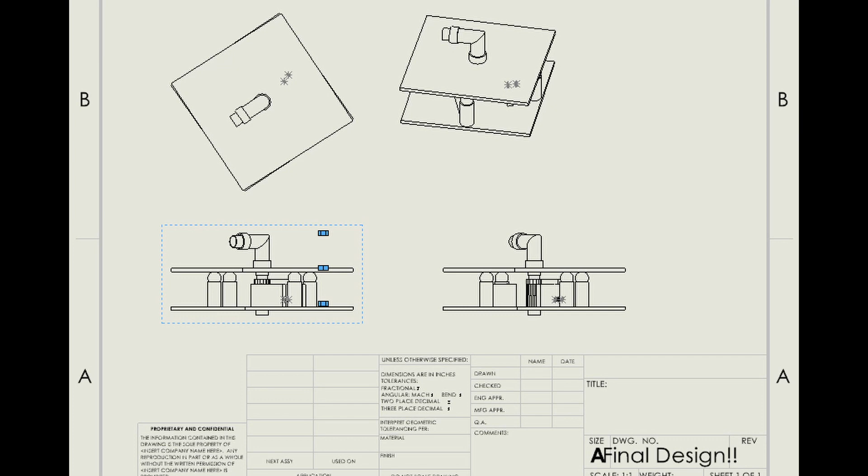This is who we are. This is how we did it. This is H2O.

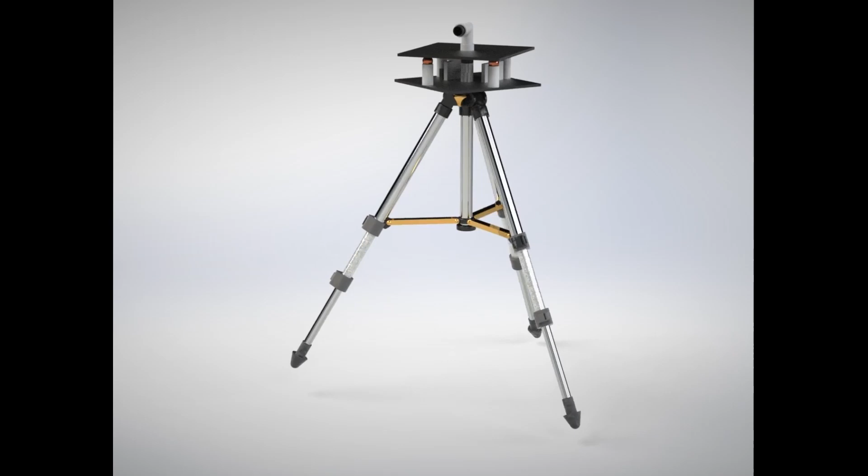We have two flat surfaces. One surface is fixed, while the other rotates with the head of the nozzle, aided by roller ball bearings to reduce friction. Our project has a locking mechanism and an oscillating feature to incorporate flexibility.

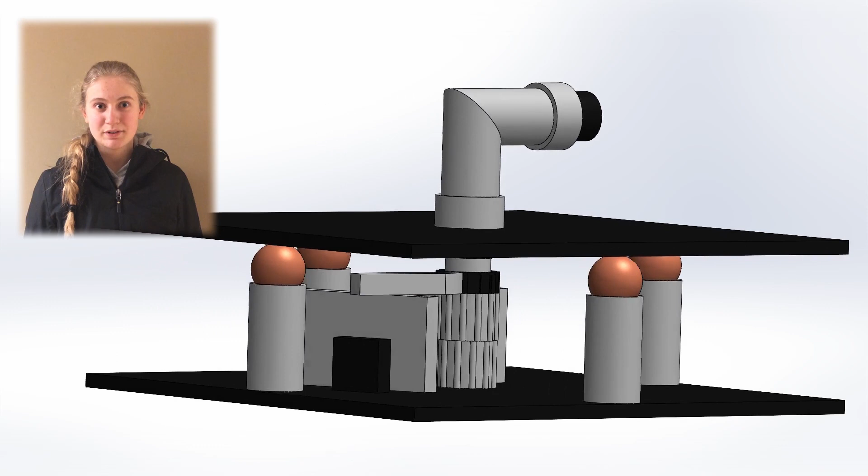The hose attaches to the bottom of the model, where the water will flow up through the pipes and come out through the nozzle attached to the top. The water can cover a wide array of space due to the oscillating feature, but can also be limited to a smaller space thanks to the adjustable locking mechanism.

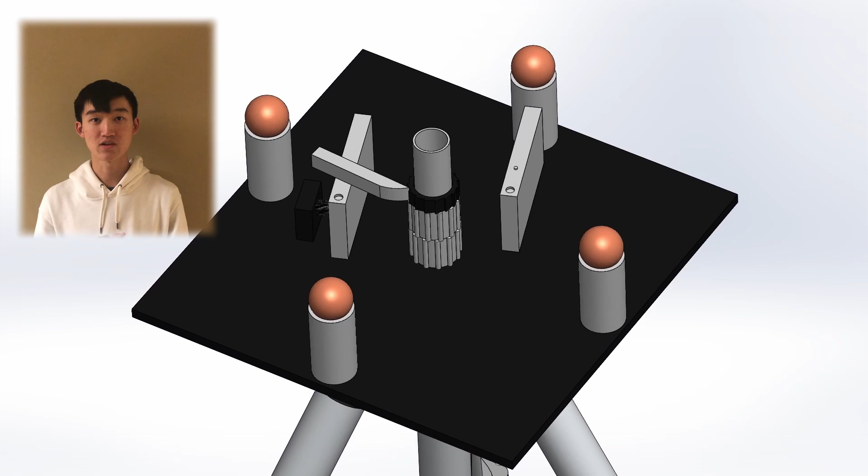The range of our oscillating feature is controlled by a wooden locking mechanism, which is able to regulate the angle between two boards as needed. This will help firefighters control the degree of turning, while the hose remains free to maintain the line, which we will make sure the wildfire does not cross.

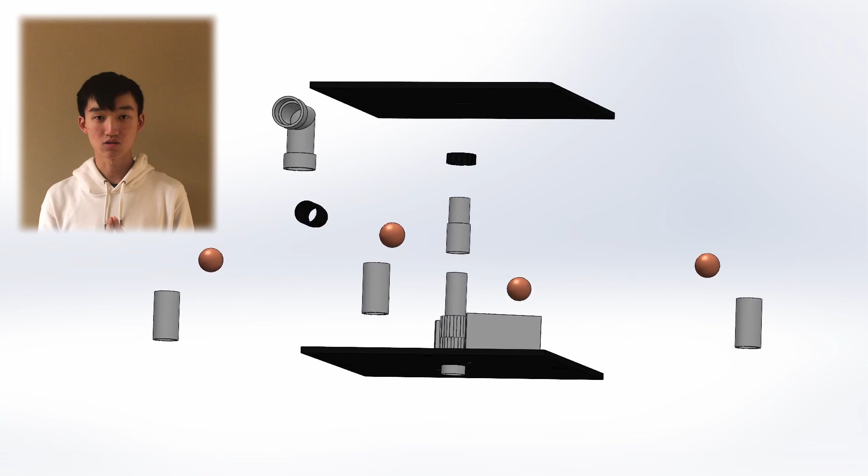Two nails are attached to the lower board, which connect separate pieces of wood to the structure. These will be the basis for our oscillating feature. The first of two will be a non-adjustable piece, attached to the spring, which we have deemed to be the nubbin. This will allow emergency responders to control the degree at which we want the oscillating feature to control the line, and overall this will create the structure of our overall board.

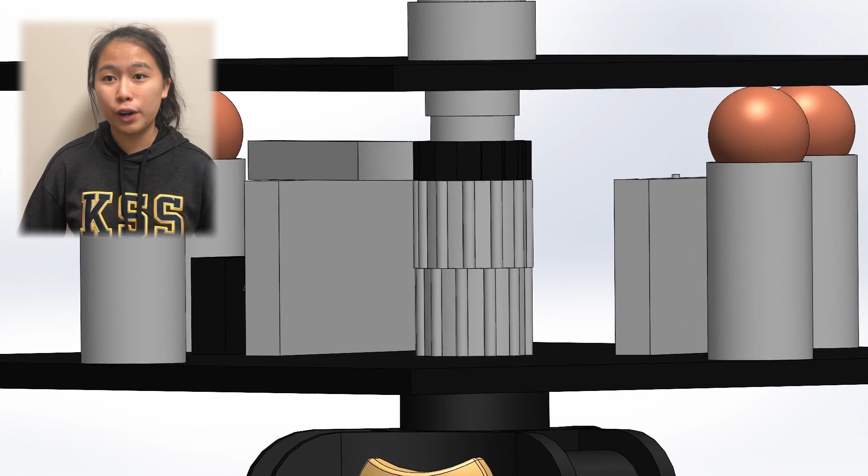At the bottom of the base, an adapter is located to attach a hose onto. As the adapter is cheap and affordable, it can be swapped out to account for different hose diameters. This means regardless of whatever hose your fire department needs, all you have to do is change the adapter and the H2O does the rest. This allows for water pressure to be pushed in a way that allows for free rotation.

While the movement in one direction is fairly simple, simply taking advantage of the torque from the water to push it one way, the mechanism to move it back is a little bit more complicated. On the free rotating bit of the pipe, there's a gear attached that is also connected to the nubbin, which is the little bit that protrudes from the wall attached to the spring.

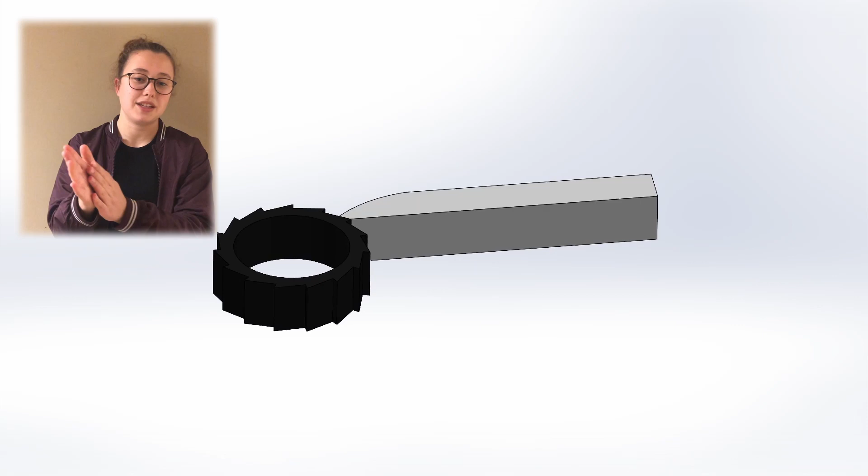Beneath the gear, there's also a spring, so as the torque pushes the hose in one direction, the spring slowly tightens. The nubbin doesn't allow the gear to retract back, so it just keeps getting tighter and tighter. However, when the arm which comes down from the top board hits the wall with the spring, it releases the nubbin for a moment, allowing the tension from the spring to pull the mechanism all the way back, starting from the beginning, thus creating an infinite oscillation.

Oh, that is our rotating feature, guys. Look at that beauty.

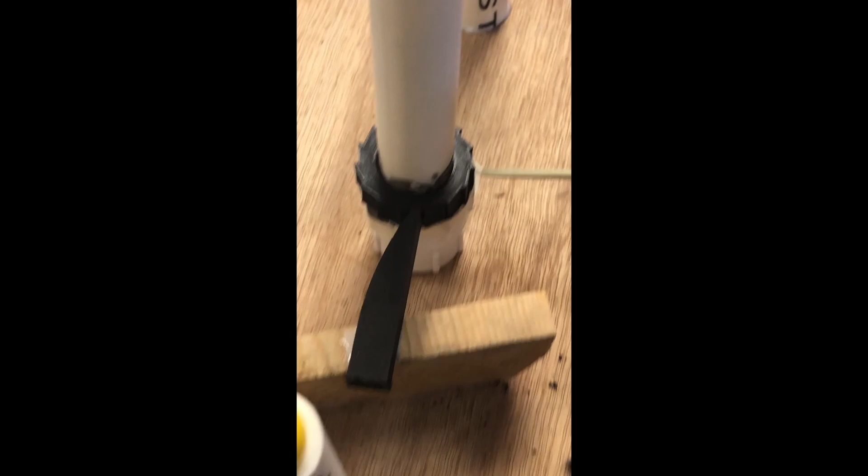Featuring retractable legs, 3 times adjustable length for unequal ground surface terrain, extreme surface grip, and aluminum lightweight construction.

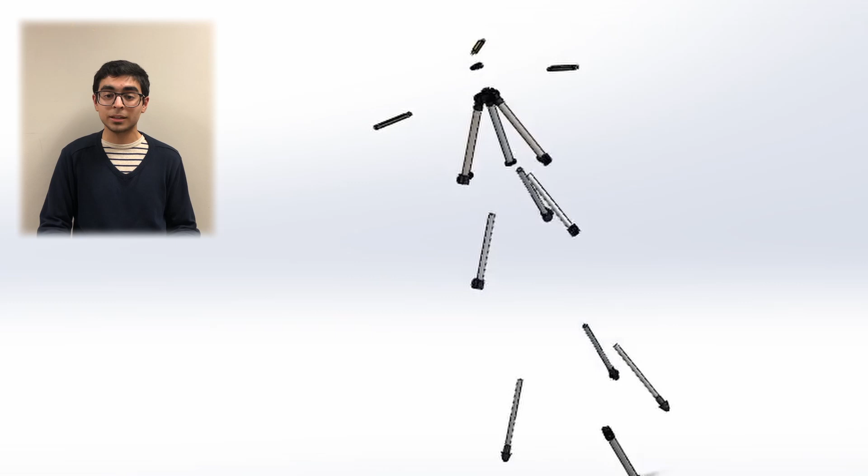Transparent parts were added for demonstration only. The valve at the bottom may be adapted for any hose fitting, and the center column is hollow to allow water to flow through into the upper mechanisms.

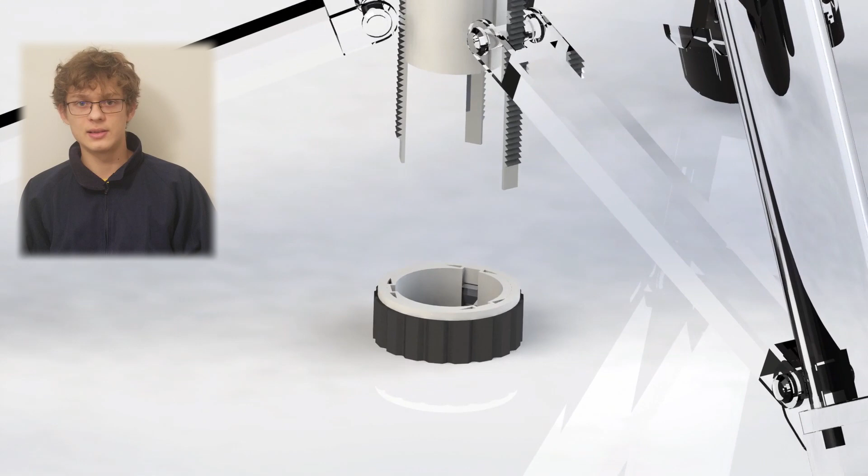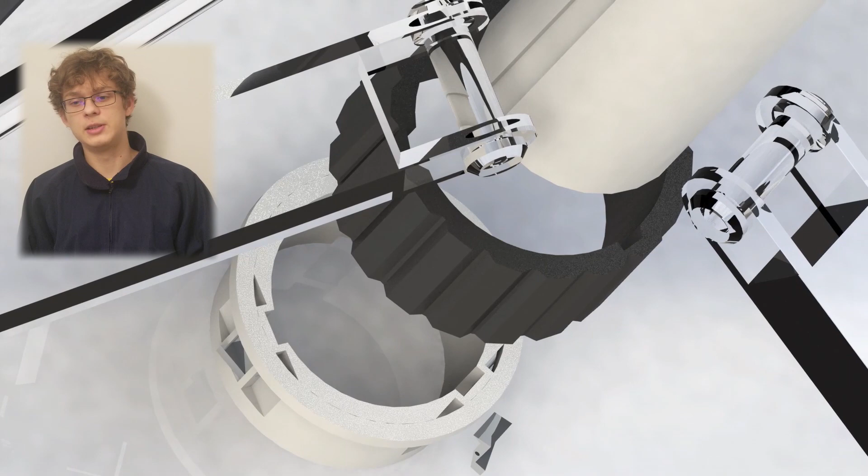The spreader uses a ratchet system to lock into place. This circumvents the flaws of a friction-based spreader by locking into place mechanically. This black part is cammed to unlatch all 3 spring tension pawls at once when rotated. The result of these features is a unique tripod adapted for creating fire lines in a firefighting scenario.

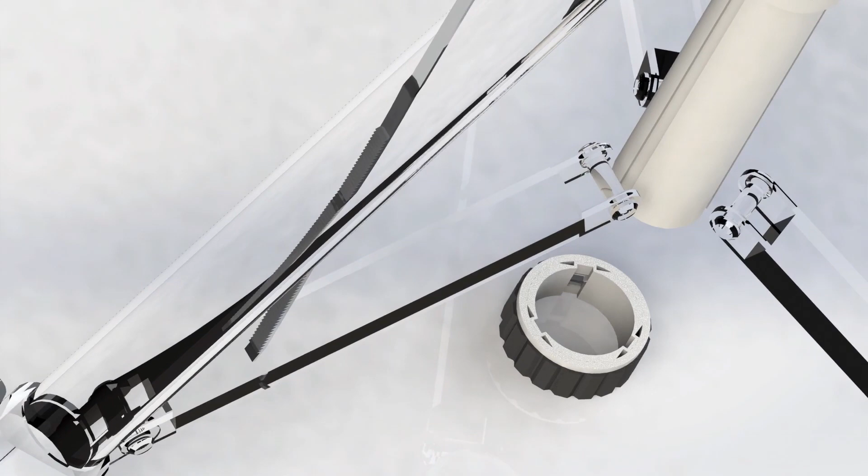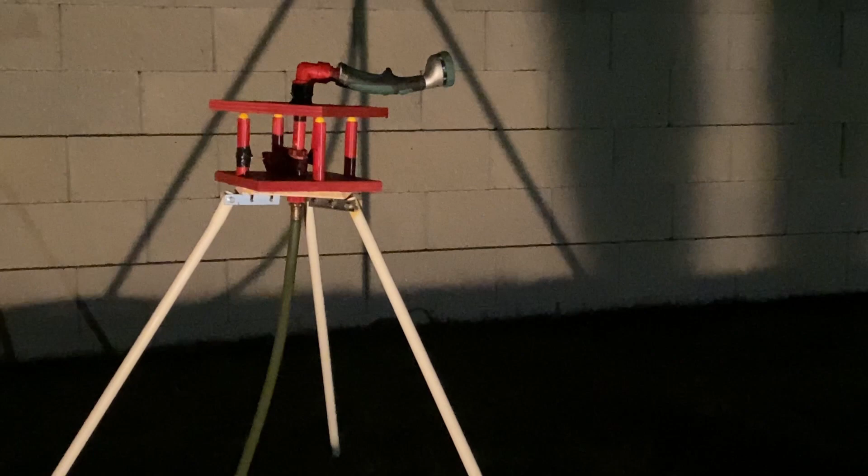And once the SolidWorks was done and we knew how it worked, it was time for the real-life thing. This is our physical model of the H2O, scaled to fit a garden hose as opposed to a fire hose.

The oscillating feature is perfectly functional, allowing a fast rebound to the start of the arc. But does it work in practice? Simply put, yes.

And this is just with a simple low-pressure garden hose, so imagine how useful a fire hose would be.

We are very proud of what we created. A device that can automate human tasks while remaining simple and inexpensive is just what we need in the fight against wildfires. So help us make this a reality, and watch us develop H2O to evolve and be the best it can be.